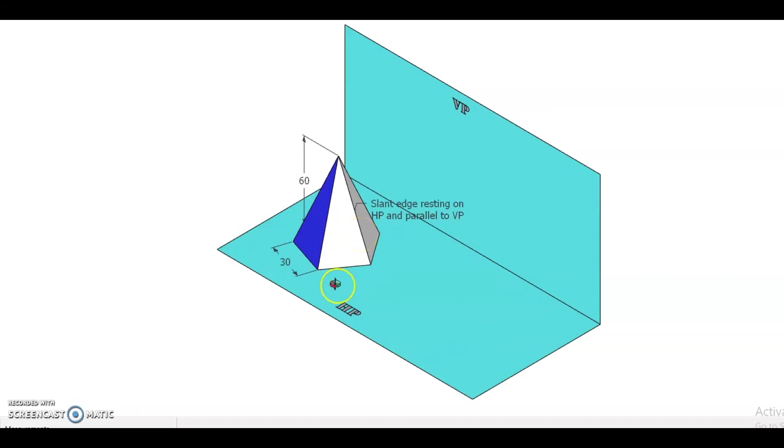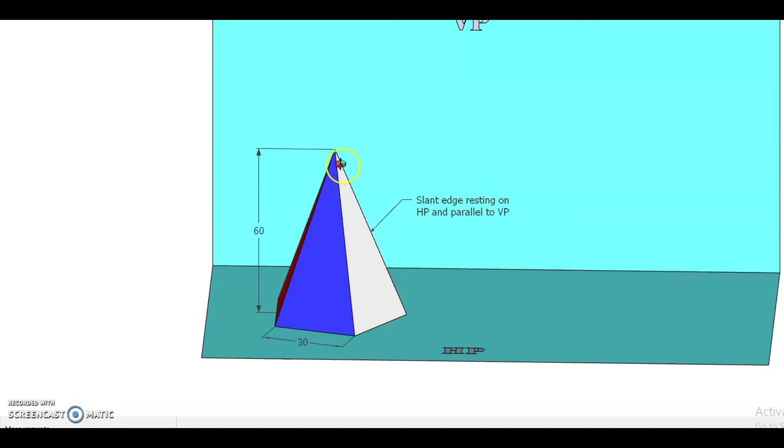Now consider a pentagonal pyramid of which the base side is 30 millimeter and axis height is 60 millimeter. It is inclined to HP in such a way that this slant edge is fully resting on HP. While resting on HP, it should be parallel to VP. So in final condition, this will appear like this one.

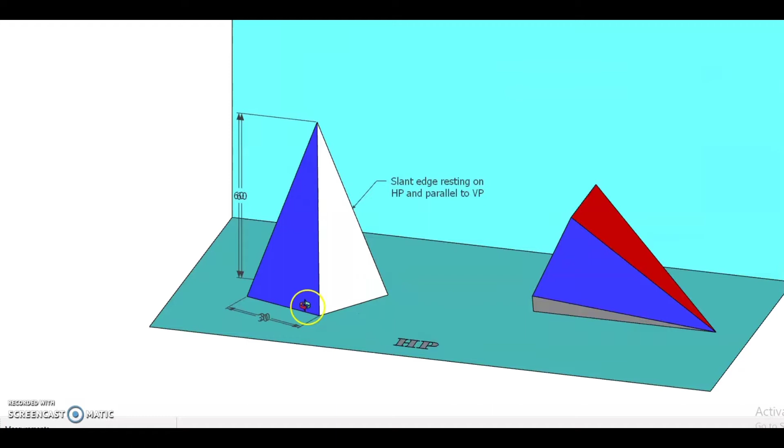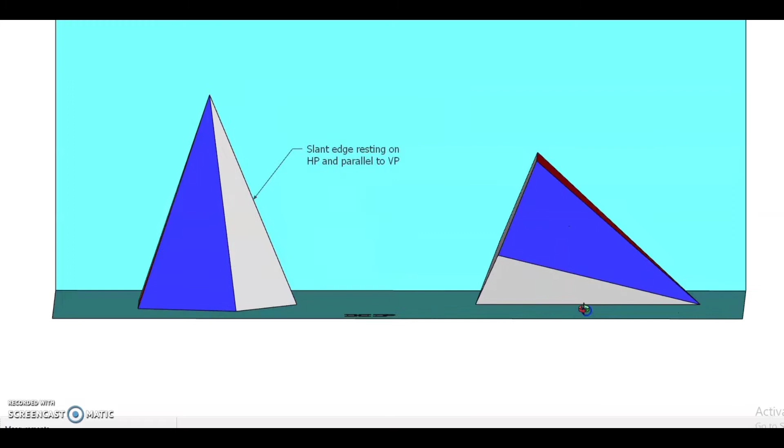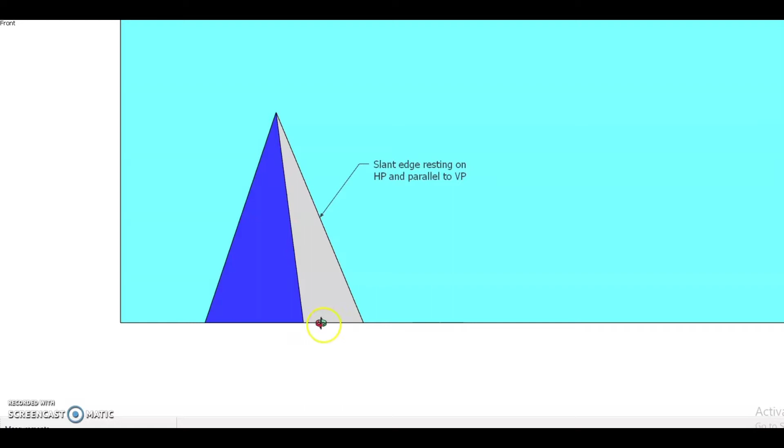So it is fully resting on one of its slant edges on HP. So this is our required condition. So initially assume that the given pentagonal pyramid is resting on its base on HP. First draw its top view, then draw its front view. Next, redraw this front view in this way, and then finally draw its top view.

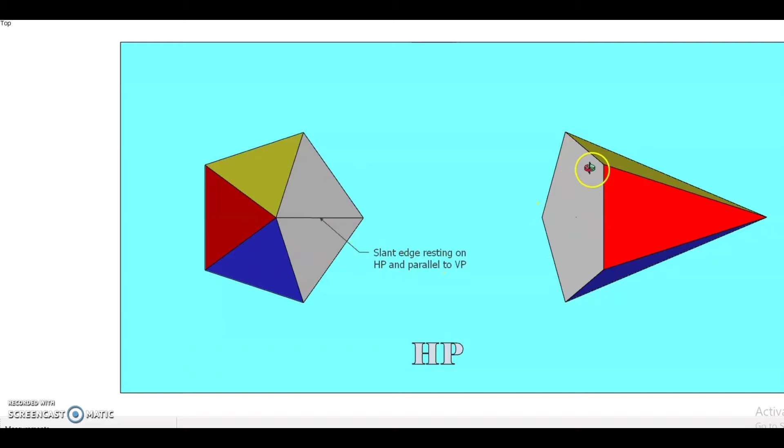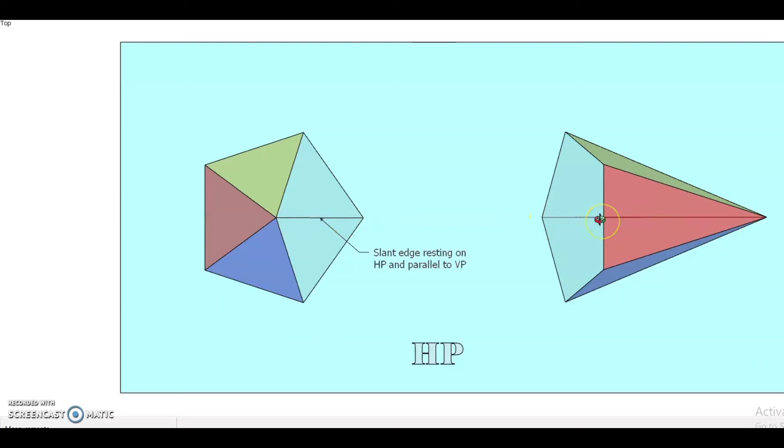In top view, yellow, red and blue colored triangular faces are clearly visible. Its base is clearly visible also. Then what is hidden? For the hidden portion, this slant edge resting on HP is not visible, which we have to show by dotted line. So this is the edge which we have to show by dotted line. So we have to draw the orthographic projections of the given pyramid.

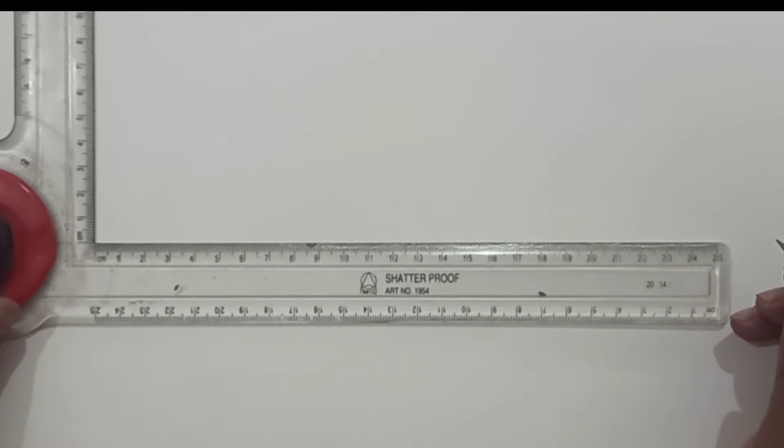Now we have to solve a problem of a pentagonal pyramid of which the base side is 30 millimeter and axis length is 60 millimeter. It is resting on HP on one of its slant edges. So initially assume that the pentagonal pyramid is resting on its base on HP. Axis is perpendicular to HP. So we have to draw the top view first. So draw this XY line. Draw this vertical line on which we have to draw one side of a pentagon. So mark the distance of 30 millimeter because the base side is 30 millimeter.

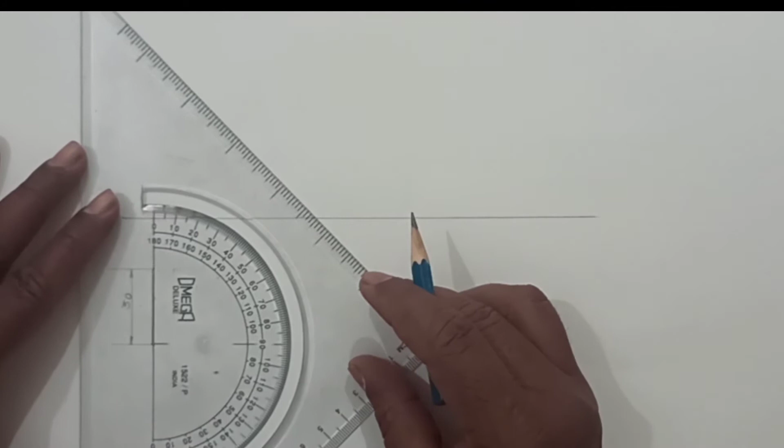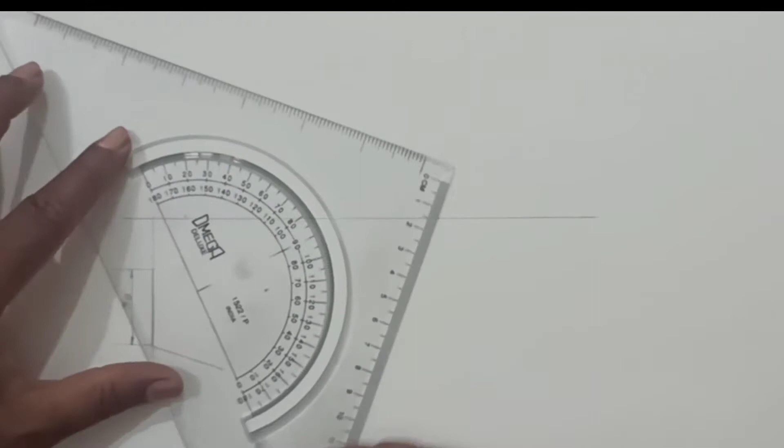Now to draw the pentagon, set an angle of 108 degree from this side on this line. Draw at this angle a line of 30 millimeter length. Then again consider this point or end of line. Now set this angle of 108 degree. So this will give us a length of 30 millimeter.

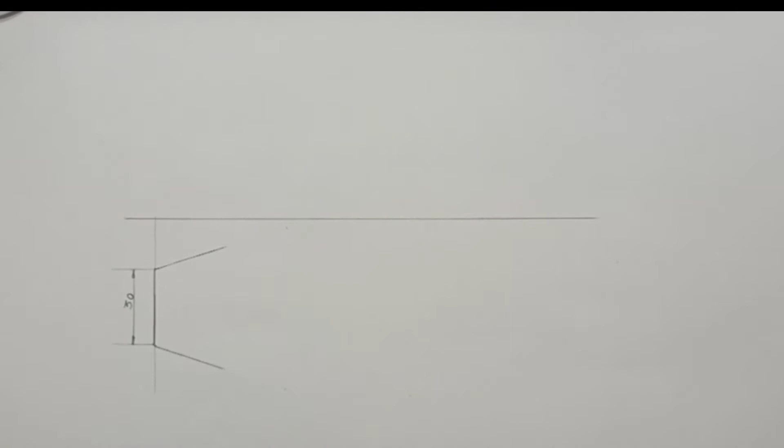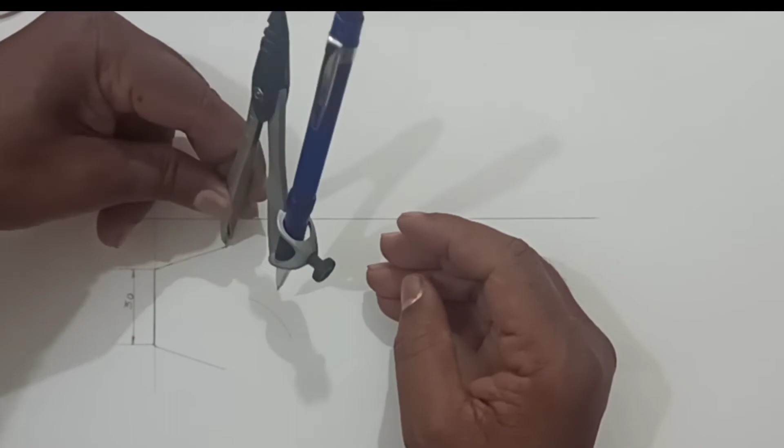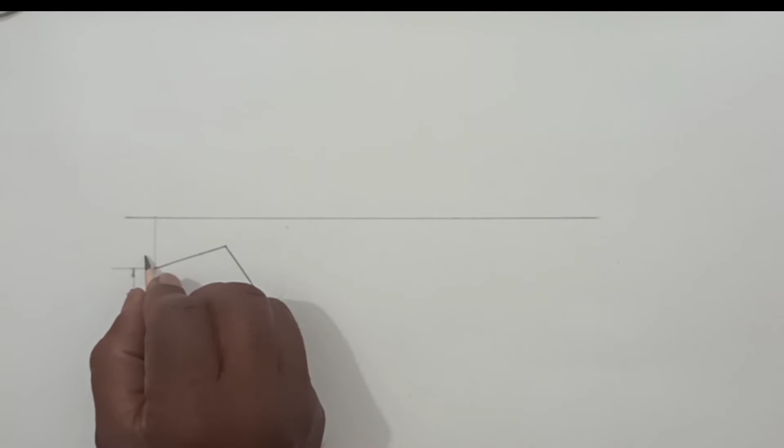Now to draw the remaining two lines, take this distance of 30 millimeter in compass and draw an arc. Again take this point and draw another arc. Now join the intersection of the two arcs to get the remaining two sides of the pentagon. So label it as A, B, C, D and E.

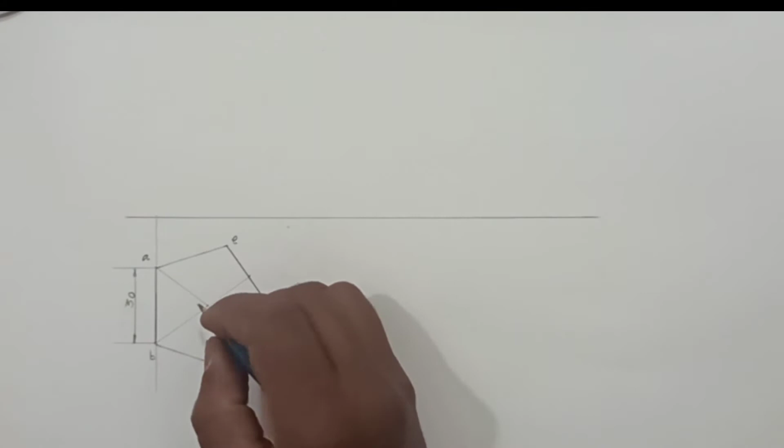Now we have to locate the axis. So consider this edge and mark the midpoint. Join this point and opposite corner by faint line. Again consider another edge. Join this by faint line. So the intersection gives us the axis position. Now through this draw the slant edges. This will show the slant edges of a pentagonal pyramid. Now through this vertex V, draw the vertical projection line and show the axis height of 60 millimeter.

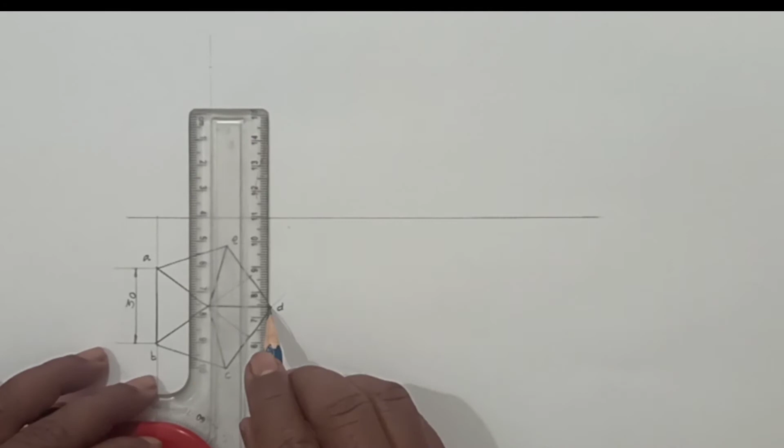Now project the base corner points. Here will be the A dash, B dash. Here will be the vertex V. Then here will be the E dash and C dash, and here will be the D dash. Now join these points. And show the axis by center line. Axis height is 60 millimeter.

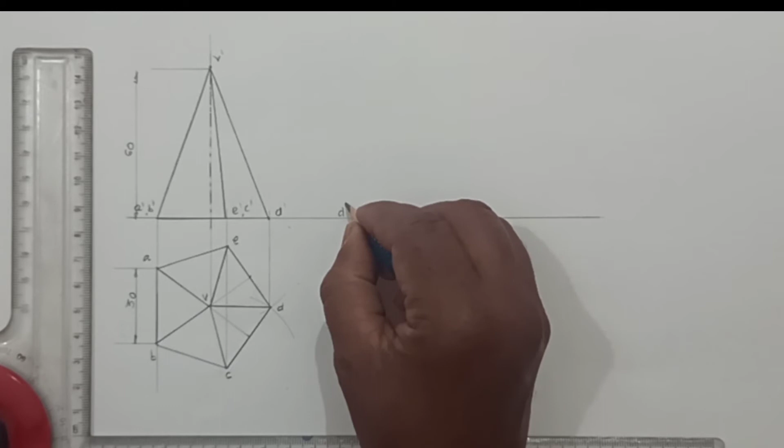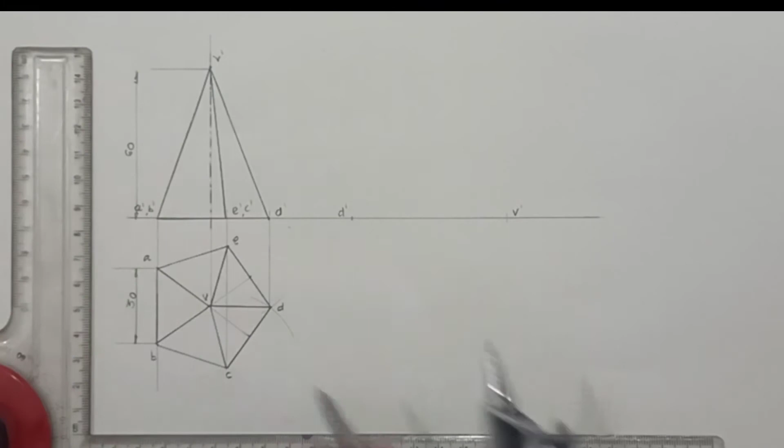Now this slant edge, that is slant edge VD, is resting on horizontal plane. So take this distance in compass. Mark the point here, D dash, and shift this distance, and we will get another point which will be the V dash. So the slant edge VD is resting on horizontal plane.

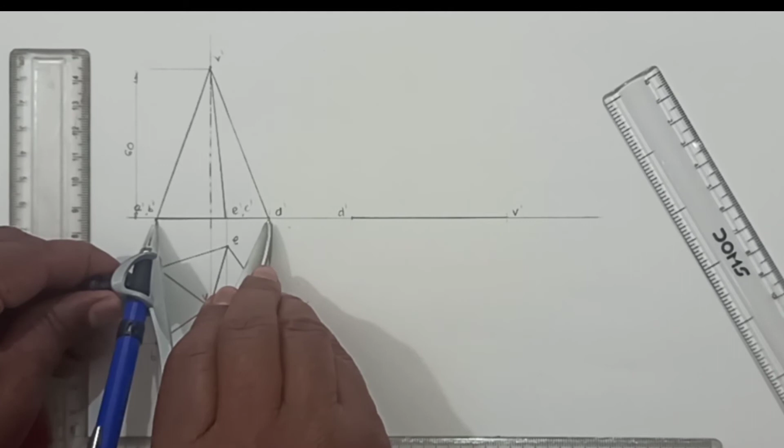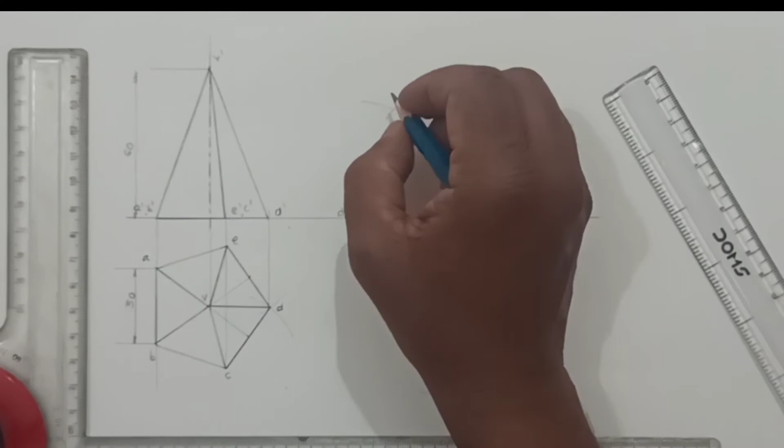Now we have to mark the remaining points. So for this, take this distance in compass, as we are taking D as the reference point. So draw an arc. Now to locate the A dash, B dash, take this distance in compass. Take this as a center point and cut it here. So we will get this A dash and B dash. Join this A dash and B dash by straight line.

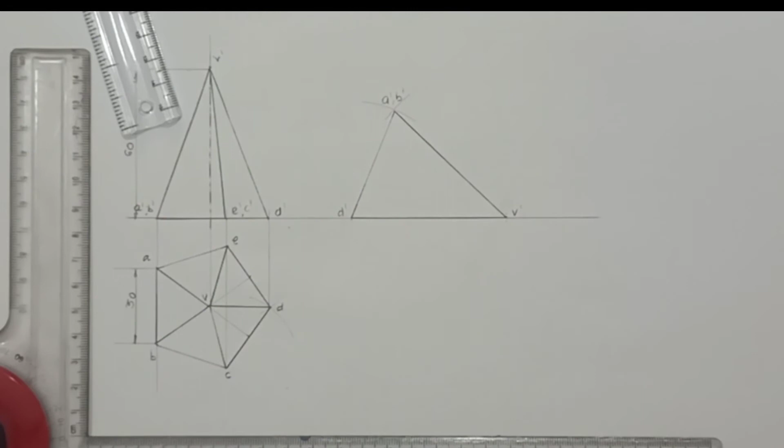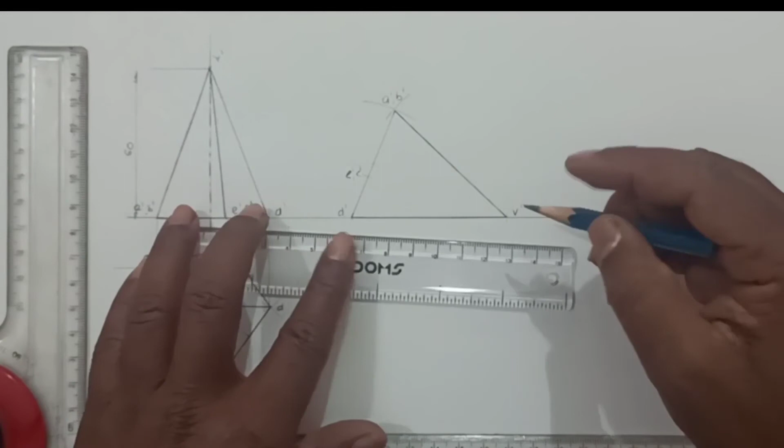Now we have to locate this point, which will lie on this AD. So take this distance in compass. We are measuring it from D, so D will be here, and mark it here. Locate the axis, which will be here. So this is point E dash and C dash. Through this, draw this slant edge, then through this vertex draw the axis.

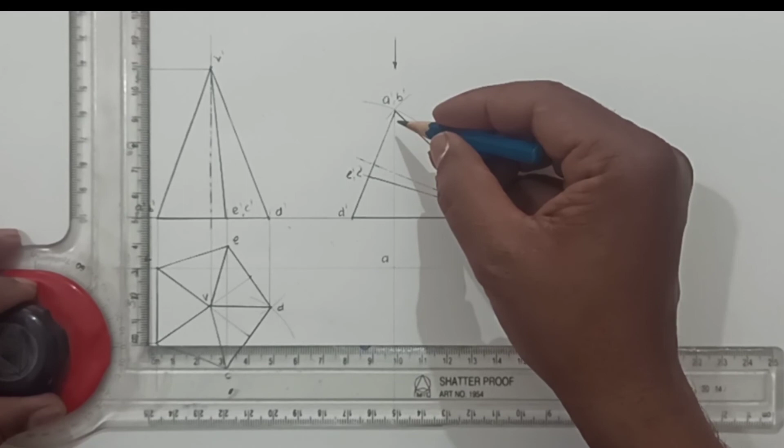Now to draw the final top view, when we are looking in this direction of observation, the pentagonal pyramid base is clearly visible. So we'll draw it first. First locate point A. Point A is here. Then B will lie on the same line. B is here. Then go to C. Through C draw this horizontal line, and C is here. Draw vertical line. We will get the C.

Then D. D is here. Through D draw this horizontal line and draw this vertical line, so that we will get D. And next is E. E is here, on this line. So this is E. So all 5 points of the base are located. Join them by straight lines. So the visible pentagonal pyramid base is shown here.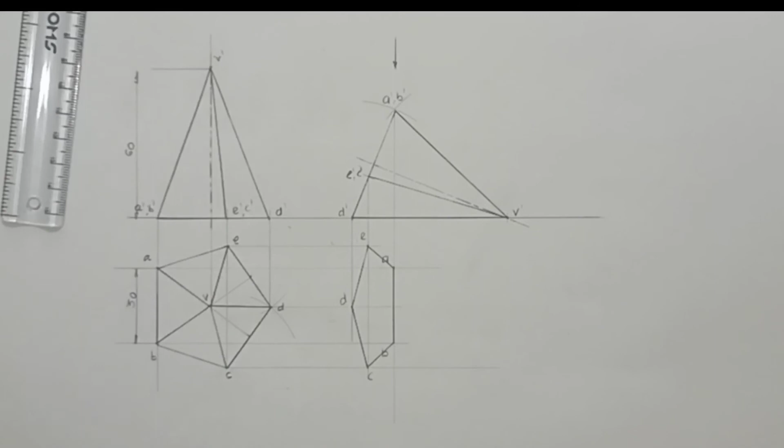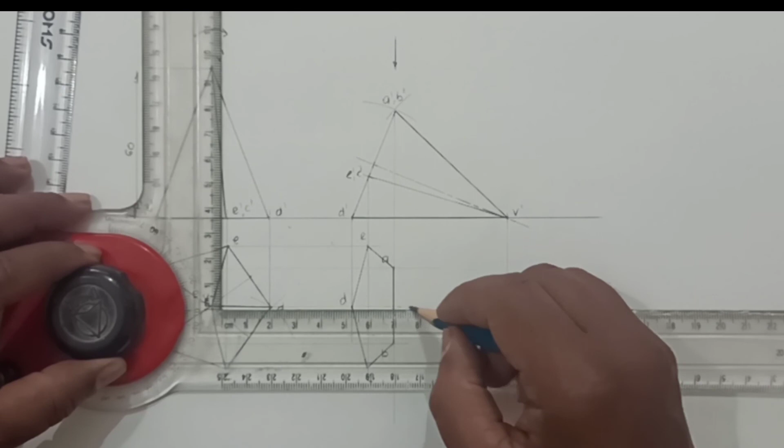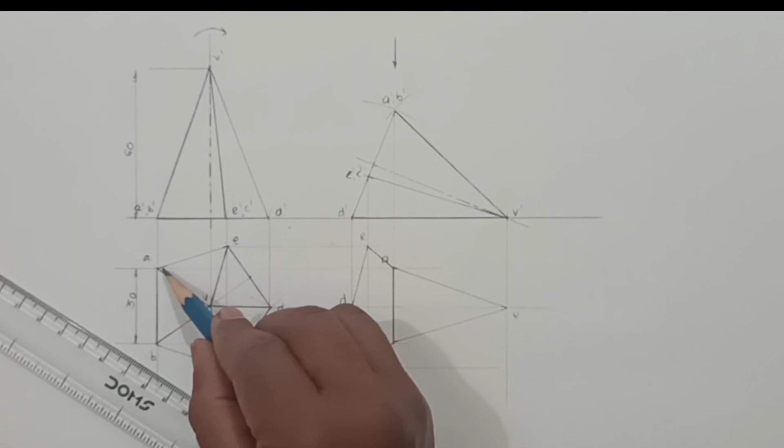Now as it is tilted in this direction, the triangular face ABV is clearly visible. So draw this visible triangular face. V dash is here. We have to locate the point V. So V will be here. Now as the triangular face ABV is visible, ABV is shown. Also BVC is visible. Then next, AEV is also visible.

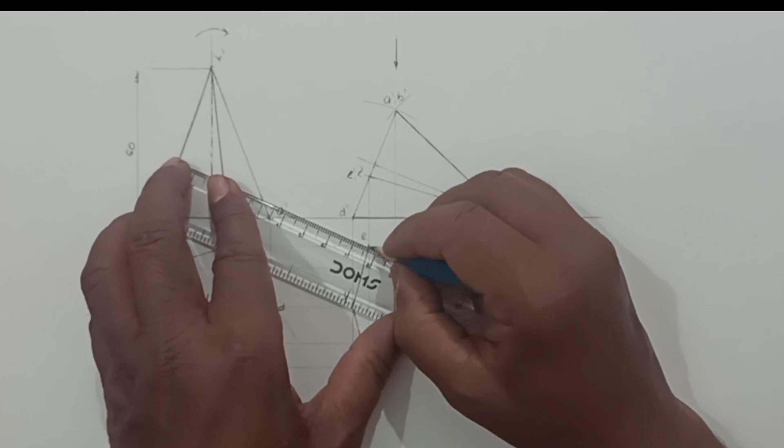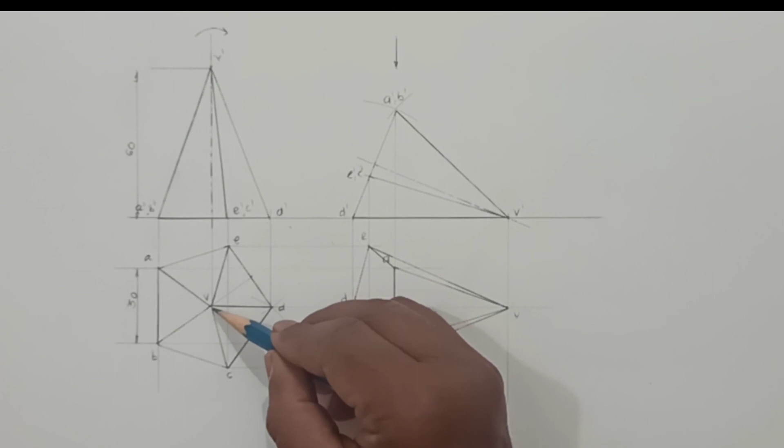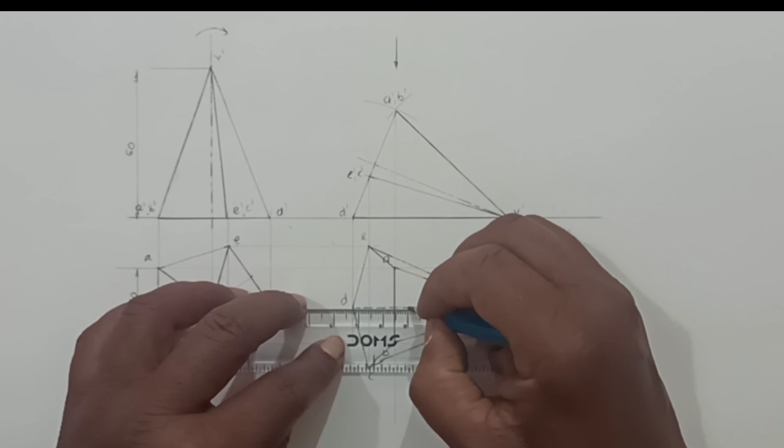Now what is the hidden portion? These two triangular faces are not visible, and this edge which is resting on HP, that is edge VD, is not visible. So VD is here. Show it by dotted lines to indicate the hidden edge. So thus our solution is completed. Control the line work. Draw the projection lines very faint. Other lines should be dark.